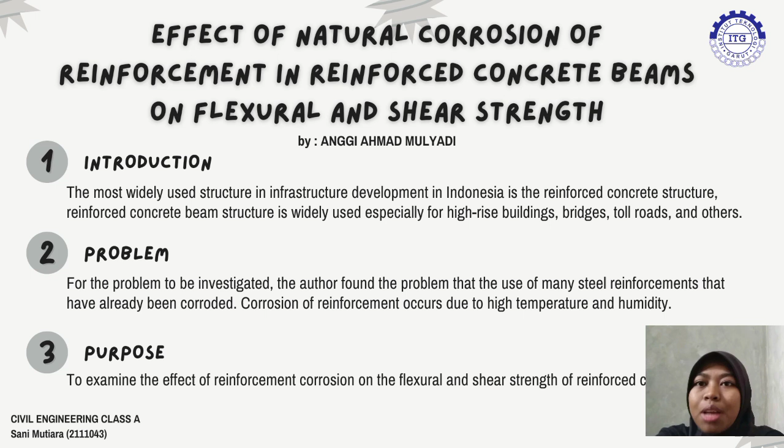Next, the method used in this research is the experimental method carried out in the laboratory. Researchers used beam samples measuring 100 by 200 millimeters with a length of 600 millimeters, 3 pieces using corroded reinforcement and 3 pieces with uncorroded reinforcement. The reinforcement used is 10 mm diameter as longitudinal reinforcement and 8 mm diameter as stirrup reinforcement.

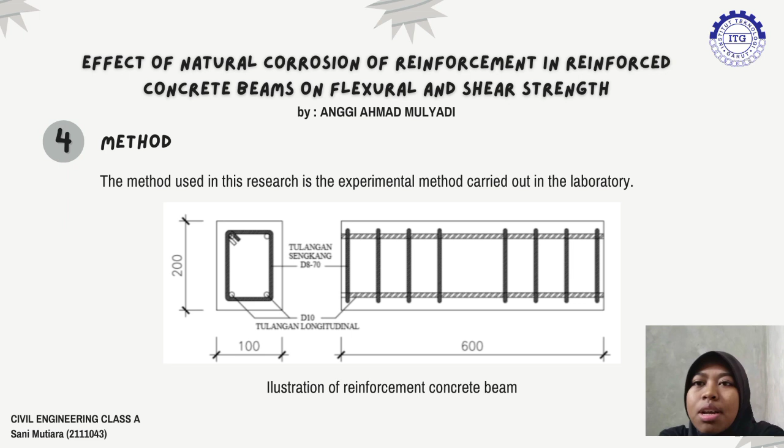For compressive testing, a cylindrical sample with a diameter of 150 mm and a height of 300 mm was used. The beams were tested at the age of 28 days, and the planned concrete strength was f'c 20 MPa. The corrosion of the reinforcement is carried out naturally in the lab in the open, exposed to rainwater, sunlight, air, temperature, and humidity over a 4-month period.

This is the illustration of the reinforced concrete beams with 8 mm stirrup reinforcement and 10 mm longitudinal reinforcement. Flexural testing is carried out by placing the concrete blocks on the support rack at the center of the support of the test equipment, then adjusting the loading until ready for testing, and loading is stopped when the maximum load results in fracture of the test object. This is the illustration of the flexural testing.

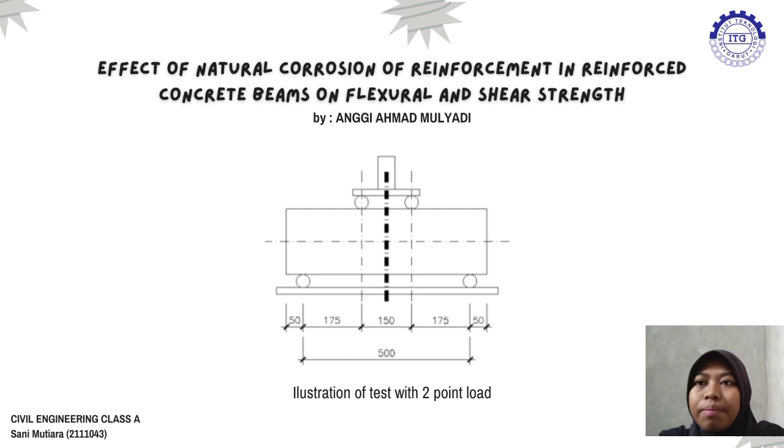For the flexural strength test, concrete beams with corroded reinforcement have an average flexural moment of 4.85 kilonewton meters, higher than the moment value of concrete beams with uncorroded reinforcement of 3.9 kilonewton meters. This is due to corrosion adding to the rough surface of the longitudinal reinforcement, increasing the flexural strength of the concrete beam due to the rough bonding between the plain reinforcement and the concrete.

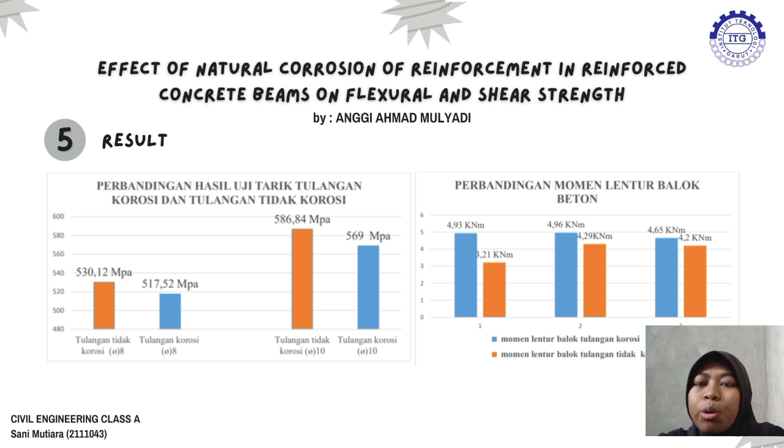For the shear strength test, reinforced concrete beams with uncorroded reinforcement are 91.04 kilonewtons, greater than concrete beams with corroded reinforcement, which is 89.23 kilonewtons. The shear failure of the corroded reinforced concrete beam has a large effect due to the concrete load borne by the corroded stirrup reinforcement.

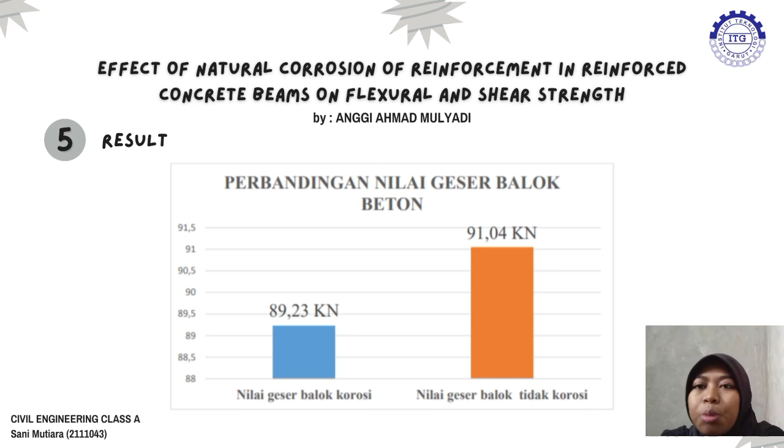From the crack pattern, in uncorroded reinforced concrete beams, cracks occur in the center area as flexural or moment cracks, while the crack pattern in the corroded reinforced concrete beams has many shear cracks, because the shear failure of corroded reinforced concrete beams is strongly affected by the load borne by the corroded stirrups.